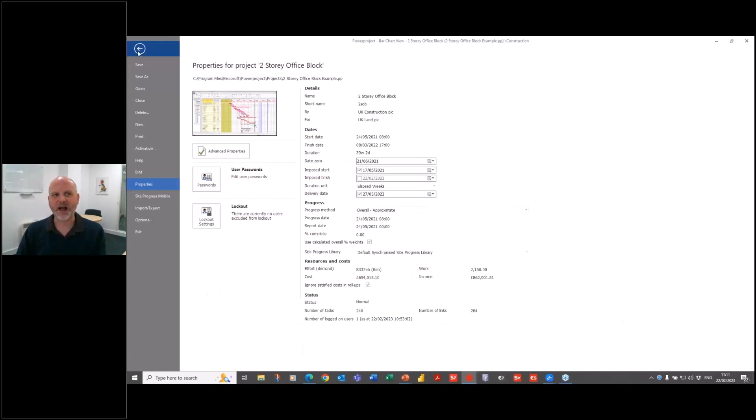But let me show you how you might do one of those from scratch. I'm going to create a project using a template, and that's part of that industry standard thing I said, or even company standard thing, where you can set what's important for you as a business, colors, codes, things like that. But it creates, as a starting point, a blank piece of paper. I then grab my mouse and I literally draw on screen these activities to represent different tasks that might be happening at a certain point in time.

I'll keep the information here quite basic. But we might have a handover stage, and that might have 0 duration. And that gives me this point in time, this milestone as we call it, on my project. Now, at the moment, I can pick up this stuff and drag it around. I can change its duration using my cursor. But at the moment, it's all free to float in time. So I want to categorize the logic between these activities.

Again, I use my cursor, click onto the start or end of these activities, and create different logic links to show when we might be moving forwards between these activities, so that I can then start to build up that flow of dependencies. When I press the magic reschedule button on the top here, that is when all of these tasks move into their logical order.

Some people like to have that reschedule turned on by default, and we can do that. We can have what's called an auto reschedule, so that as soon as I add a task, it jumps into its most logical place, and you don't have to wait to do that. But you'll see that everything gets quite jumpy when I do this. So some people much prefer to have auto reschedule turned off, so that you don't get that sort of impact straight away as soon as I make a change. Let's turn that off for now.

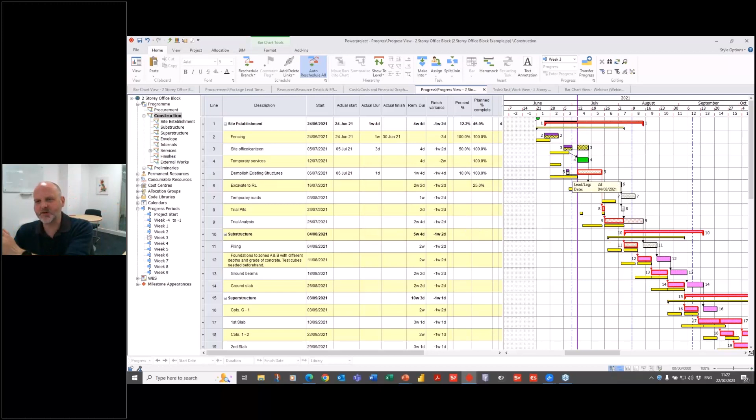Now, what we can't do is leave behind the line at the end of week 3 tasks that should have been completed. If it's the end of week 3, I can't have stuff in the past. I need to ask the software to move it all forwards. And that's where the reschedule comes in play. So if I hit the reschedule option, I want to straighten this purple line at the end of week 3. And it moves forwards all the stuff that's still to be done and leaves behind all the successful things that we have achieved.

That is, again, really tricky to do in some of our generic competitors like Excel and Microsoft Project, because I've got multiple progress periods here. I could actually have displayed multiple progress lines so that I've got different views of what happened when, and I can toggle this button at the top here to show the different weeks. Now we're in week 5. Well, week 5 occurred, something else happened. We did manage to complete all of that. I'm going to color it up using a different color because of the fact it's now in a different week.

I've got a purple section, and now this kind of horrible light brown - sorry, I didn't choose the colors for this demo. I rescheduled everything again, and I've left behind this breadcrumb, this track of what happened where and when.

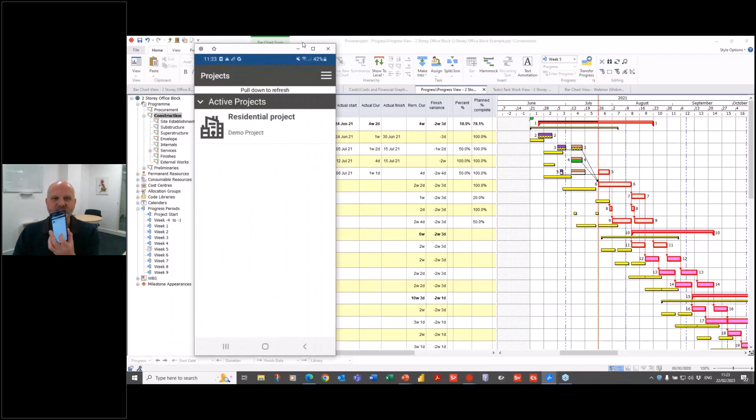This is going to be really important if I need to explain to someone what happened on site, and why. I'm doing this natively within the Powerproject planning software, and we all carry a mobile phone in our pockets these days, so we have a mobile phone tool. You're seeing a replication of what I've got in my hand on the camera screen here.

I can go into my mobile phone and find, for example, this road, named road base, and say in my mobile phone how much of it I've done in a given period. When did I actually start that activity? When did I actually finish it, etc.?

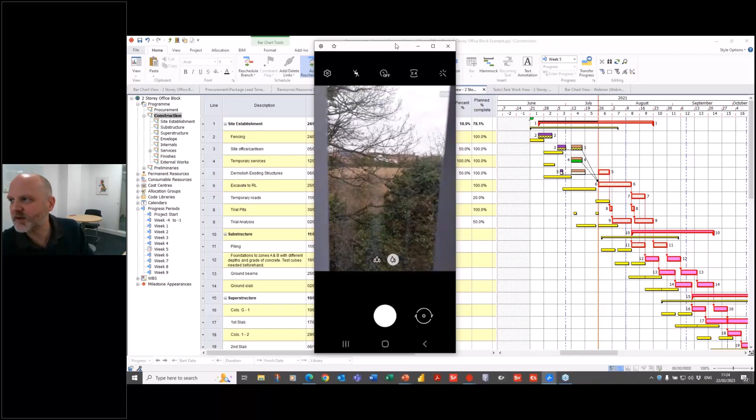I could take photos to prove my point. So let me just turn my camera on. Apologies, you don't want to see my face, but let's point it out the window at the building site over the road. I can go into that picture and say, look, there's something here that I want to report from my mobile device back up to head office.

I can draw on here, identify where there's an issue. I could say snag as highlighted or whatever. I can add comments like this.

And anything done on the mobile phone then gets sent back to the main project planning tool you're looking at in the background, so that we've got this communication link between those using the desktop planning tool and those with mobile devices.

In a house building environment, where I've got all the little plots per line, I get this view where I simply tick off each individual build stage. I don't really care how much of that one-day task I've done - I want to know, have you done it, yes or no?

By far the easiest way is to tick that box and show that information coming back from the mobile device into the planning app. That's how we can help keep all these projects flowing and moving forwards as we go further on.

And just finally, as we start to tease out the next steps for project planning, here I've got an example where I've imported the BIM model - I've pulled in the 3D model, in this case of a retail outlet. Now I've got a nice Gantt chart here with colors, codes, etc., but we're also using this as the basis for the animation of how we're going to deliver this project.

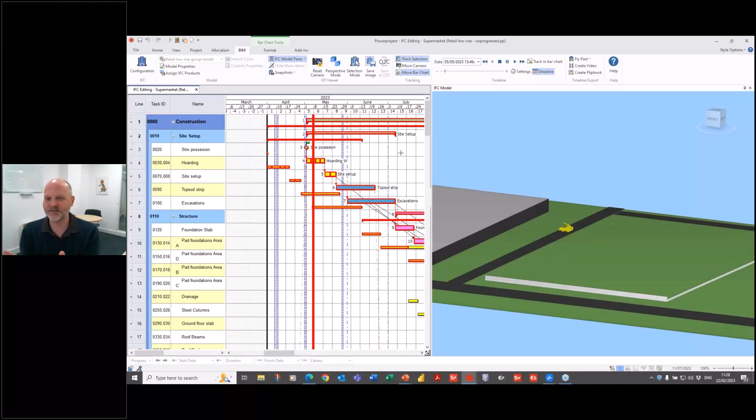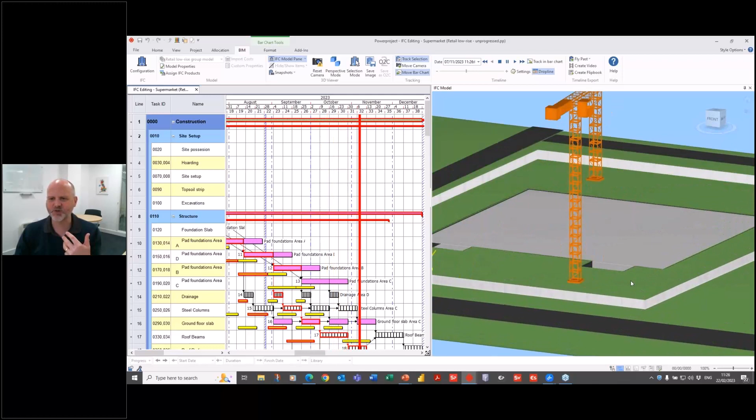Powerproject's also showing a few examples of site objects, so site hoarding, site objects, porta cabins, my little cartoon digger going around there. It adds a bit of color, it helps with our presentation, it helps with the explanation of what's going on. Things like the positioning of tower cranes, so I can understand the logistics for this project, all tied into the project plan.

So if there are changes on the Gantt chart, they're reflected in this animation. But again, this shouldn't just be about creating a nice video for tender - that would be missing the point. It'd be excellent to help us communicate to a trade what's happening tomorrow when they arrive on site.

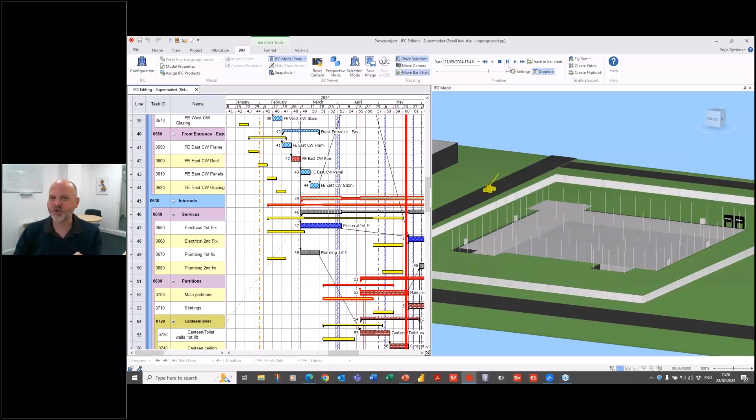It'd be excellent as a tool to help us show an example, if I bring that up on the screen, of what we were supposed to do versus what we actually did. We can actually have in Powerproject this view of plan versus actual in 3D. So if I just go back in time, stop that, go to there and hit play - I've got plan versus actual.

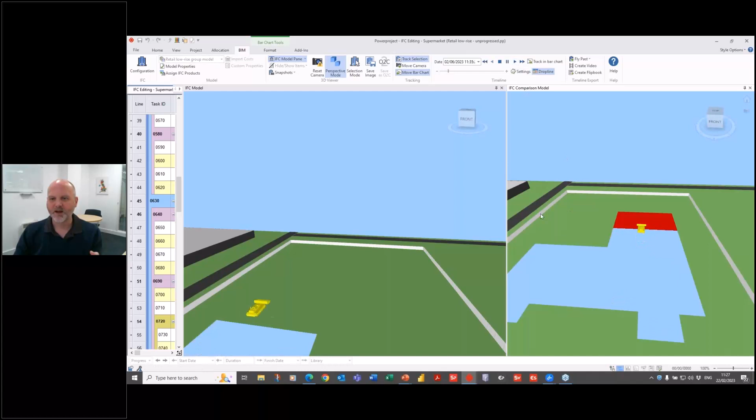I can actually look at two views of the same project and say, look, on one side this is what we're supposed to do, on the other side this is what the new timeline is telling us. I can do a visual comparison of the impact of delay, and that helps with my communication and conversation around the problems we're having because of the delays of this project.

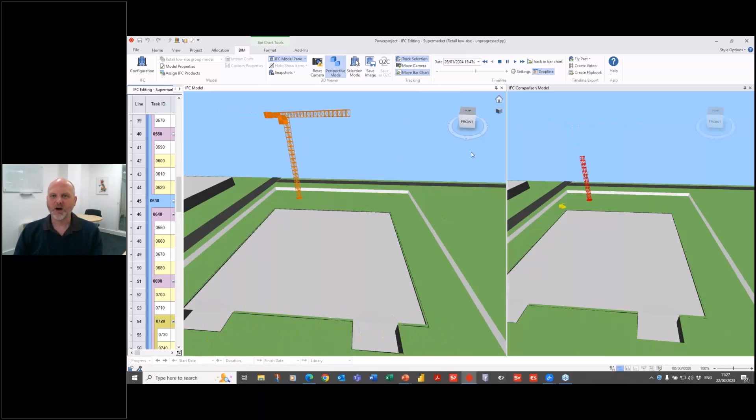So, lots of exciting things that using industry standard comprehensive project planning can do to help improve your maturity and your outputs and deliverables from your projects.

So let's talk some pounds, shillings and pence here. If what I've shown you today is of interest, you can buy that product as an annual subscription from Elecosoft. We have both a single user model and a concurrent user model.

Single user subscription, annual payment to allow basically one person, one computer to use the software, £880. Concurrent user model is a fantastic way of reducing your costs because you share the license over a number of people. The license is flexible, so when someone logs in it consumes a license, and when they log out, someone else within your team has access. So you don't have to buy 5 people a license each, you buy 1 or 2 shared licenses for £1,500.

Now, we also provide a whole comprehensive set of training services around our software. A lot of that is based online these days, using Teams and Zoom to deliver training courses virtually to you wherever you happen to be. But we do also have classroom sessions. People get a lot more from a classroom session often - you've got a trainer over your shoulder looking at your screen, giving you hints and tips the whole way through, plus interaction with clients and competitors during lunch hour and stuff like that.